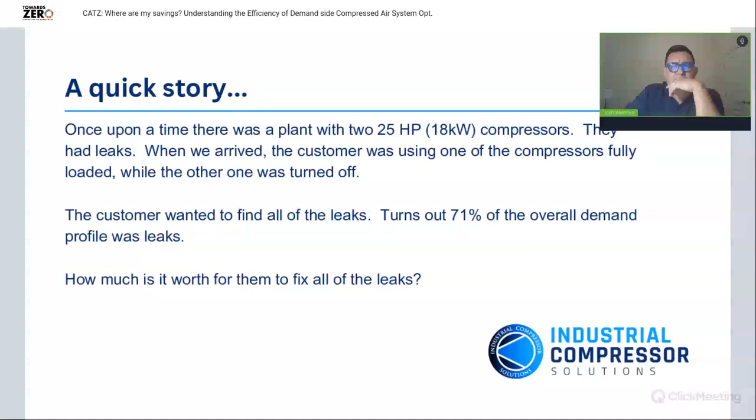Again, my name is Josh. I've been in the compressed air industry for about 25 years. Most of my career has been in the demand side of the system. I am a general contractor and a mechanical contractor. So yeah, I spend most of my time on the demand side and doing demand side auditing and optimization.

Very proud to be a member of Compressed Air Towards Zero. I am part of CAGI in rotary positive standards as well as system assessment. I represent the United States and ANSI for safety in compressed air. I am a member of the AICD as well as the Palmetto chapter of the Project Management Institute.

So again, where are my savings? First things first, we kind of need to talk about and make sure that we're all on the same page as to what savings are and/or means.

At the risk of proving to all of you that I am not an accountant and will never be an accountant, when we talk about savings in a facility, we talk about a couple different terms that get thrown around.

The first thing I'd like to point out is the difference between cost savings and cost avoidance. If we have an electric bill that we are currently paying and want to reduce that, that is an example of reducing existing cost and cost savings. Whereas cost avoidance is an effort that we do to prevent having to pay something.

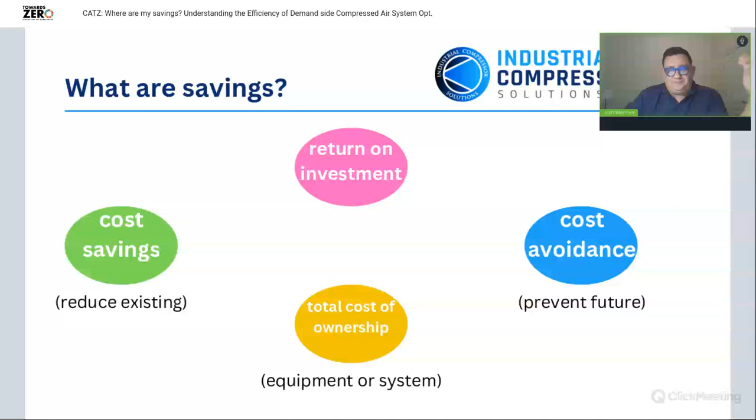Now, when it comes to total cost of ownership, that includes everything from start to finish that we have to pay for a piece of equipment or for a system. If we make improvements or change our operating mentality without spending, then we can affect the total cost of ownership through cost savings and cost avoidance.

But if we have an expense related to that, now we might hear a term like return on investment, where we're trying to evaluate how long it'll be before that savings is realized.

So my contention and what I want to talk about to you guys today is that this is not exactly right.

In my experience, there is an efficiency to our optimization methods. And if we are going to present to the customer some method of optimization, it's in our best interest as well as the customer's best interest to evaluate the efficiency and expectations of what that optimization is going to bring, and how long it's going to last.

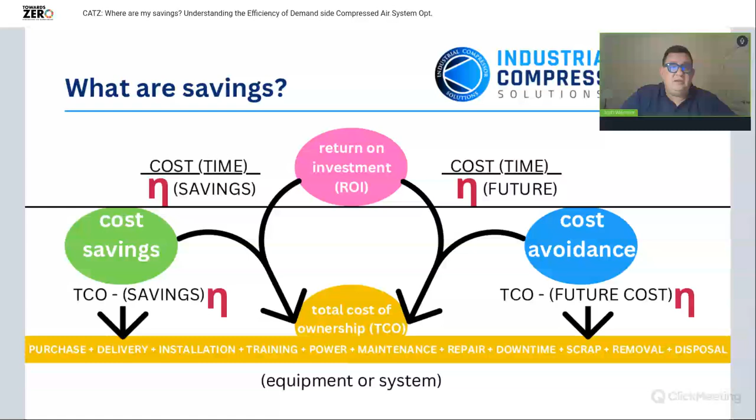So here's my super slide for the day. This is a very, very basic illustration of the fact that the compressed air system cost goes up over time.

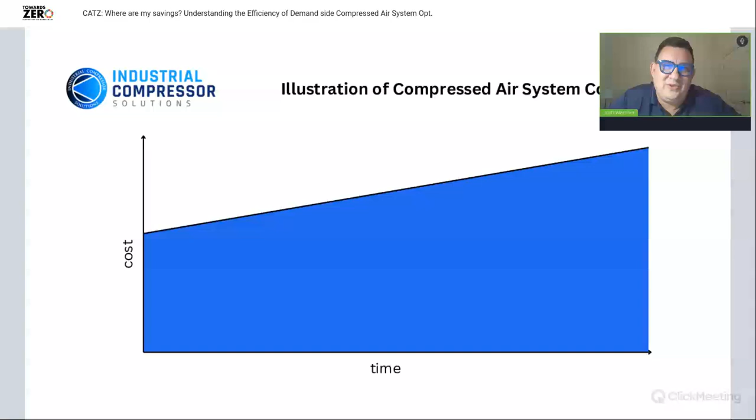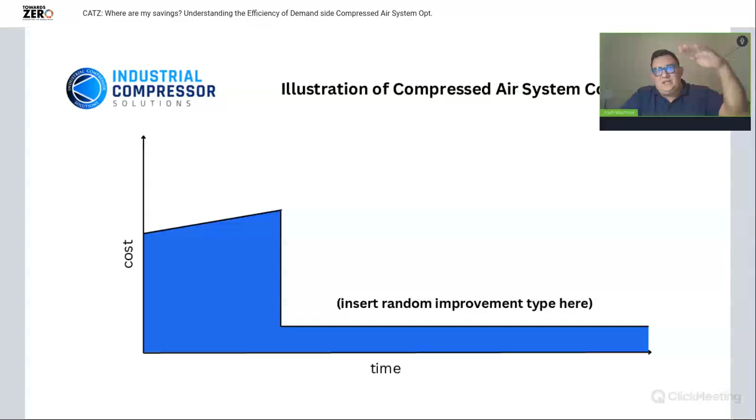If we perform an optimization, we are attempting to reduce that cost. But I'm going to show you today that there's inefficiencies in our optimization. Not only am I going to show you that there are inefficiencies, but I'm also going to talk about the fact that our optimization decays. So what ends up happening is, even though we made an improvement or optimization, we sometimes are not able to maintain the system at that optimized position.

So that efficiency, that optimization decays back to the original line. This is very similar to holding a balloon underwater. A lot of times we look at the people on the supply side of the system, and they're selling these really beautiful, high speed, super efficient air compressors, and every one is more beautiful than the one before it. Whereas on the demand side of the system, a lot of times it's like we're telling our customer that their baby's ugly. When we talk about demand side optimizations, we are forcing that system to a place that it does not naturally want to be. So I do try to use that analogy of demand side optimization being very much like holding a balloon underwater. It doesn't always take a whole lot to get that balloon underwater, but it does require that we consistently hold it there, and we force it to stay there.

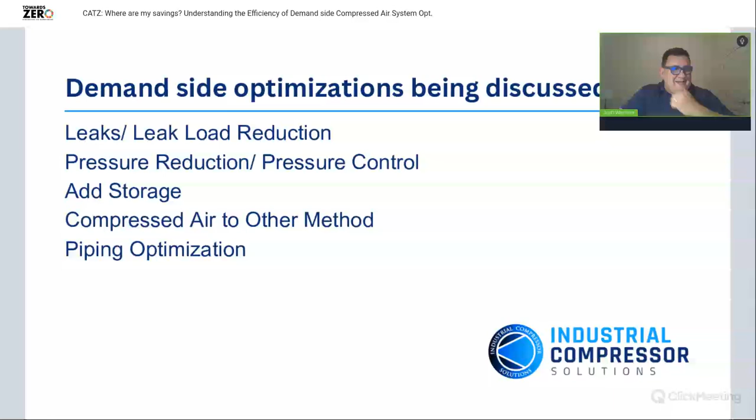So first, leaks and leak load reduction. Thanks, Daniel.

So when we talk about leak load and leak reduction, I first want to put up the control comparison between power and flow.

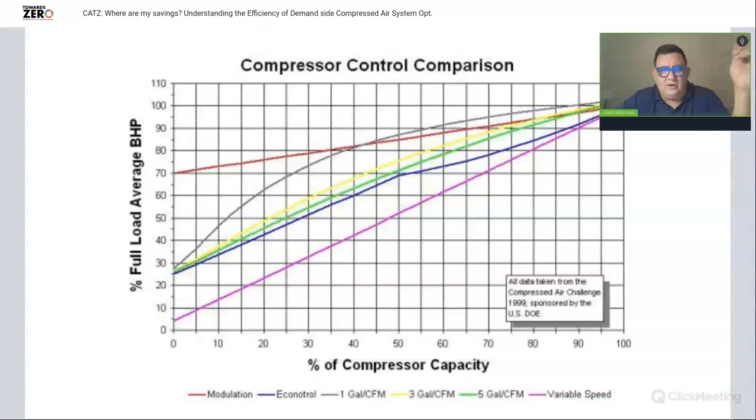In the story we talked about in the beginning, the customer had two 18 kilowatt compressors running in cascading control with local controls. Both compressors are oil-flooded rotary screw, and they loaded and unloaded, with the load set points offset from each other so that if the demand profile exceeded what one compressor could do, pressure would drop to the point that the second compressor would load and continue running without operator action.

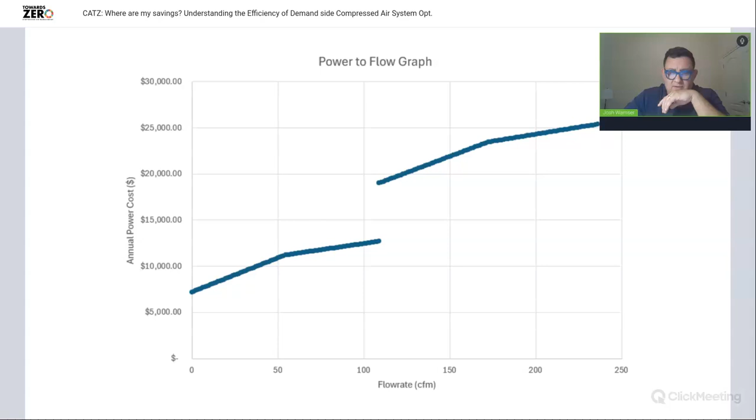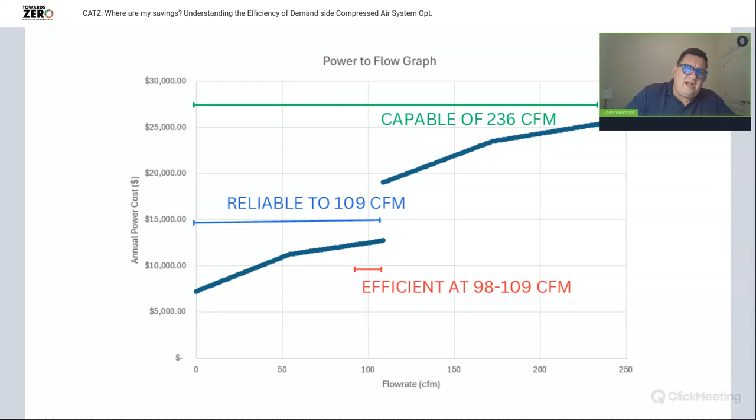So in this case, and I apologize for not changing these to worldly units, 236 divided by 35.315 equals, so that was right by 6.7 cubes overall, and around 3 cubes reliable without having the second compressor come on. But efficient operation was really in the top 10% of that compressor.

Now, when we got there, we noticed that the second compressor was turned off just temporarily, and the first compressor was running right at the top of its band. The interesting thing is it was running so much at the top of its band that the compressor stayed fully loaded, but system pressure was moving up and down while running at full load. We'll talk about that later, but this is another example of, instead of varying flow to maintain a constant pressure, we were varying pressure at a constant supplied flow.

As we said, the leak load was 65% of the overall demand profile, and that was right at 2 cubes.

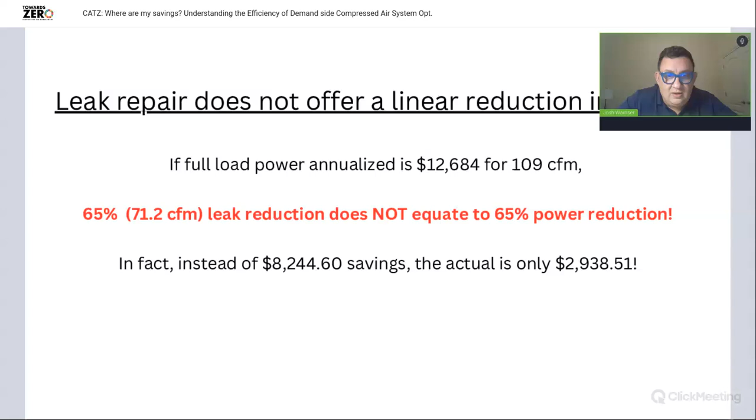But if full power annualized, which it was, $12,684 US, 65% leak reduction does not equate to 65% power reduction. In fact, of the savings the customer thought they were going to get, they weren't going to see $8,244 a year in savings. They were only going to see $2,900, based on the fact that we don't go proportionally down to zero. We didn't have linear efficiency across that demand profile.

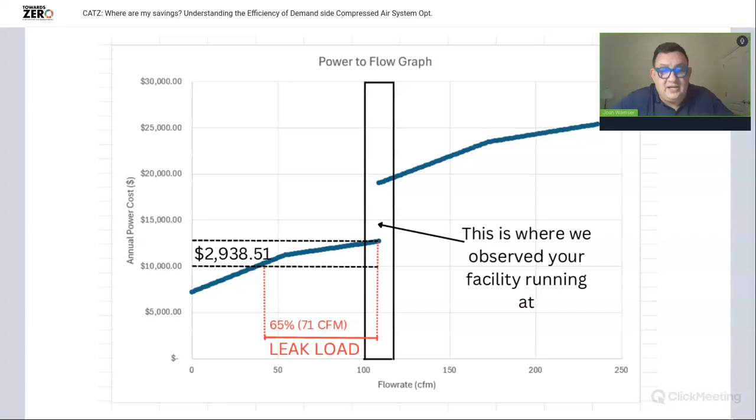So we have to follow the curve of the compressor. And what we end up seeing is our change in power cost is only $2,900. Now, if we had promised the customer $9,000 or $8,500, we would have been setting up that customer for failure. But I've got to ask you, is even that $2,900 real?

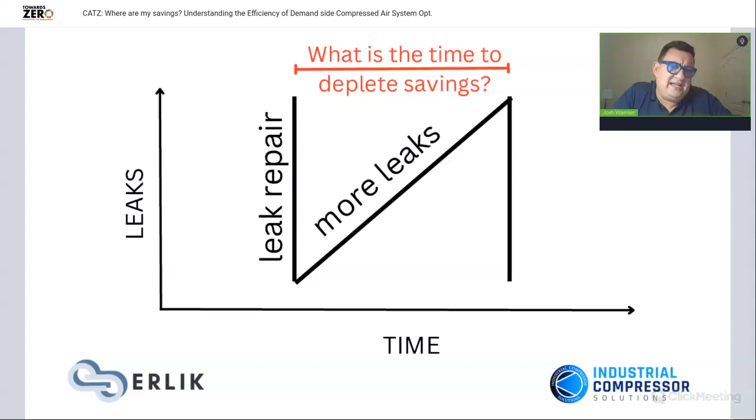We have to take into account the decay of the savings. I'm not saying that if you have a leak in a fitting and fix it, that leak will necessarily start again. But what I'm hoping you'll consider is that the leak load is itself a number. It changes by pressure fed to the leaks, and the leaks get worse over time. So even when we make a repair, at the same time more leaks are happening. We can bring down our leak load, but it will slowly come back up, and then we'll have to commit to another action. But the amount of time it takes to deplete that savings is important for calculating how much the customer would actually save.

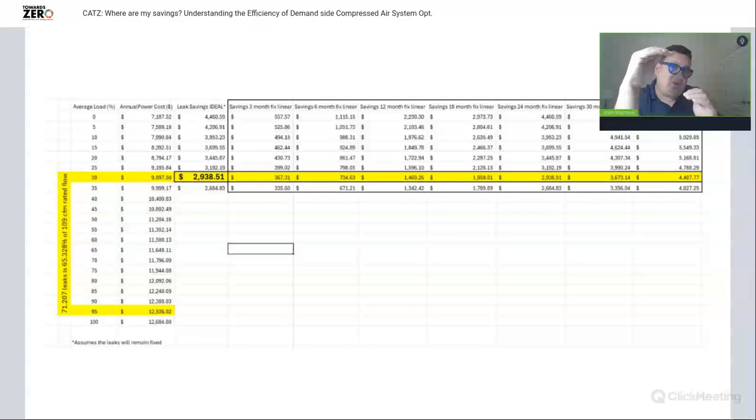So if $2,900 is my expected savings per year based on being able to reduce 100% of that leak load, those leaks would have to either stay completely gone - the leak load would have to stay zero for 12 months to get that $2,900 - or in a linear form, it would have to return back to its original position in 2 years. After 2 years, you would have had the savings promised, the annual savings promised based on linear decay.

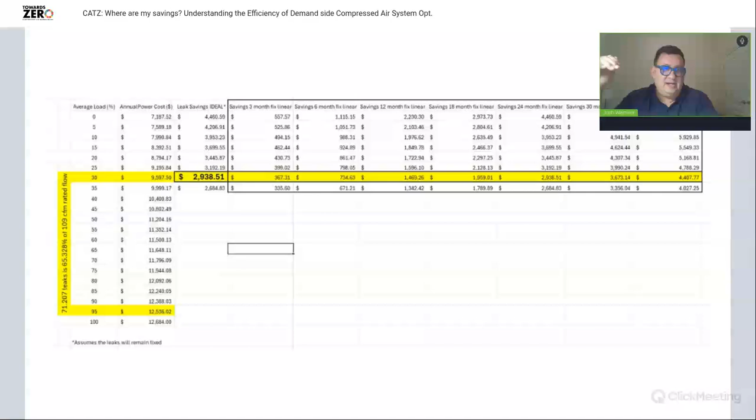But how about that second compressor? In a position where you have two compressors, load unload, oil flooded rotary screw, at that 3 cube point, or almost exactly 3 cubes, you can be in a position where compressor one is running fully loaded and the second compressor is off, or you could be at that same flow rate with compressor one running fully loaded and compressor two running unloaded.

The difference between those two positions is zero for flow, but in this case was $6,300 in power cost. Just by not allowing that compressor to run in an unloaded state, we have a cost avoidance of $6,300, as well as the fact that in a system with two compressors, the moment we're running that second compressor, our reliability position has changed. And the moment we're required to run that second compressor, we don't have a backup compressor. One compressor shuts down, hiccups, trips out, whatever, and now we can't maintain plant pressure and we're down.

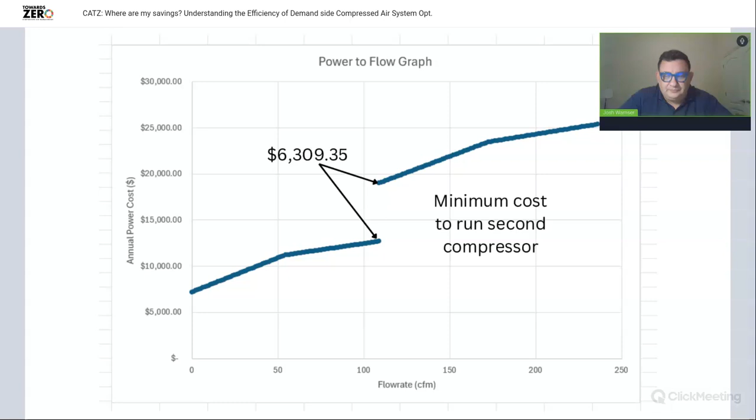So now we have a $2,900 savings, or some percentage of that we can try to get - a percentage we can fix and a percentage we can keep - as well as $6,300 in this position of not having to have the second compressor on.

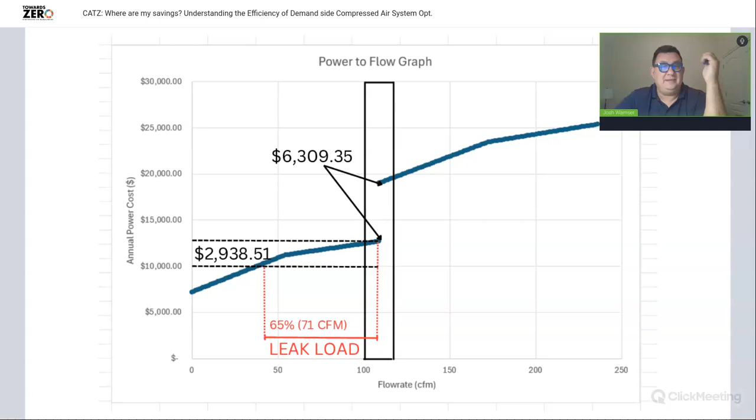Going back to the financial terms in the beginning, this is the difference between cost avoidance and cost savings. Now, both of these have efficiency attached to them.

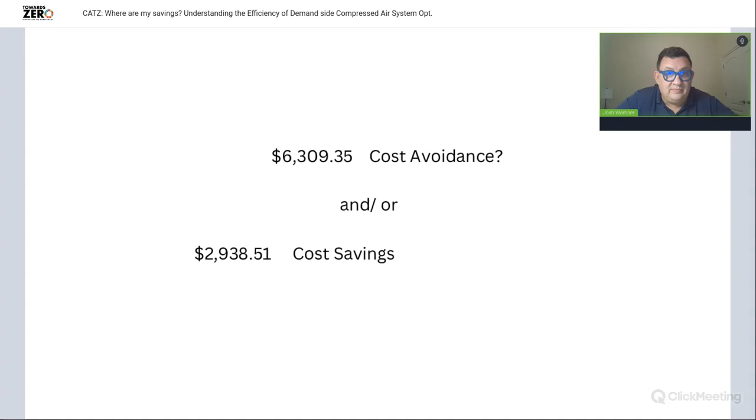So in this example, there are a couple different costs we have to look at with the customer. I think one of the critical points is having the customer understand that we're not over promising anything. We want to be very realistic with the customer as far as what are they intending to save, what is the cost to do the leak study and the cost to make the repairs, what is the time to deplete the savings, and when are we going to trigger another leak study.

This conversation ended up being really positive with the customer because we found that preventing the second compressor from coming on is the most important thing. That was good enough to change the employee's mindset on fixing leaks in the facility, and they had their maintenance people charged with going through after hours and fixing leaks.

Now I make half of a little joke here. It's a little joke, but I also want to be careful that I'm not being disrespectful to people that sell air compressors for a living. When a customer says we don't have enough air...

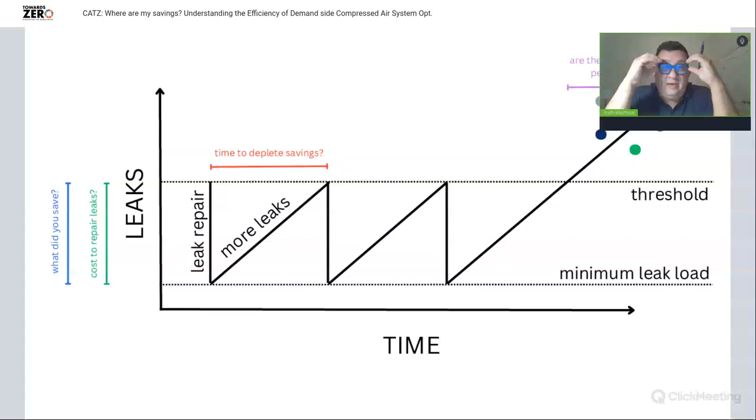it is natural for a compressor salesperson to evaluate how much air is being used and provide an air compressor to solve that need. They might not be trained in the demand side, and the customer might not even be wanting them to look at the demand side. In that scenario, the compressor salesperson is doing what they are paid to do by putting in, hopefully, the most efficient and most reliable offering possible to meet the customer's demand, instead of trying to optimize that demand before making a purchase.

This goes to what we're saying about when that demand profile increases. If we don't have a backup compressor and we don't have monitoring, automation, or controls, what ends up happening is this demand profile keeps increasing to the point where the supply cannot overcome the demand requirements. In that case, pressure starts dropping until something starts failing and we'll get a call. But by then, the plant's already down.

So my argument is use benchmarks and thresholds to say, let's keep the demand profile short of what is needed for the backup compressor to come on, and let's sound the alarm when we go into our backup compressor. Now, if we do that, my question and my challenge to you all is, how do we know how close we are to that threshold line?

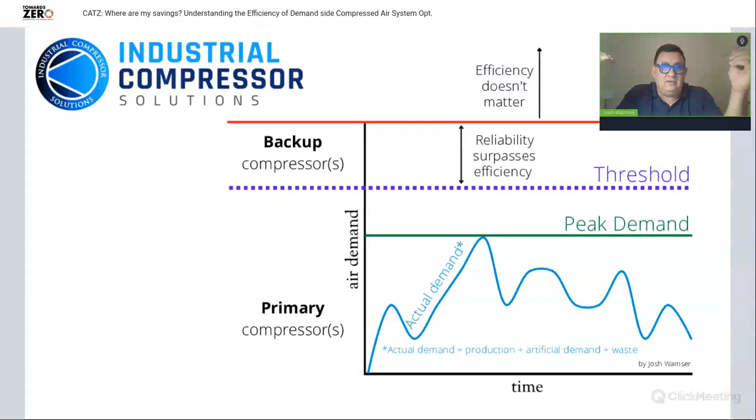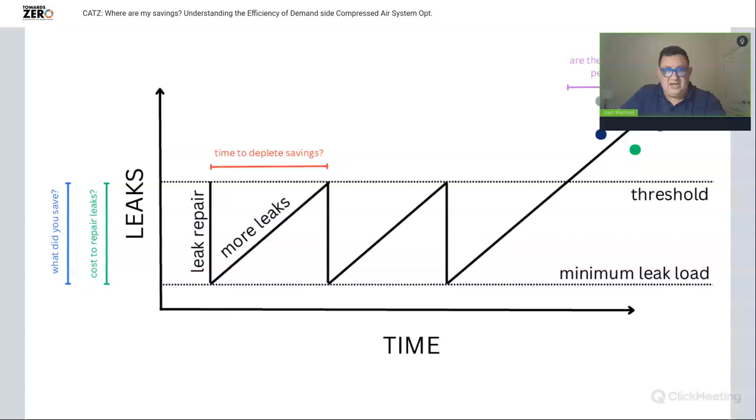If we know that in this case we have 3 cubes before the second compressor comes on, and if we're operating at 2.9 cubes 10 hours a day, then we are right there at the point where we are about to change our reliability position. In that case, we now have to answer with a rental compressor, with an additional compressor, or with demand side optimization to get us back to where we can operate properly.

As far as leak and leak load reduction goes, a common practice is assuming the reduction in flow is proportional to a reduction in power. That's just not correct, as the inefficiencies go, especially with the effect on pressure with unregulated processes.

If we have to shut down to repair leaks, there's a cost of having the line down or the process down that has to be accounted for against it—compressor room efficiency at the new demand profile, running leaks versus shutdown leaks, depending on where and when we measure the leaks.

If we look at a process and we supply air to that process, but the process is off or not in running condition, any leaks on the secondary side of the solenoid valves internal to the process are not being fed. So you lose the demand, but you also lose the waste. Depending on when and how you calculate your leak load, and how you're doing your leak studies, that's going to tell how much you're going to capture as well.

Now, if your leaks are on the downstream, secondary side of the solenoid valves, the cycle rate of that process equipment is also going to affect the savings back to power. So if that line is only open 30% of the time, we can't account for 100% of power savings, even on a perfectly matched efficiency from initial demand profile to new demand profile.

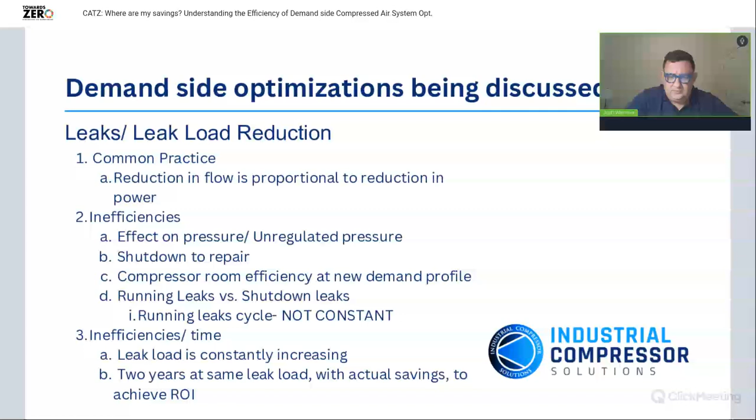Okay. All right, so pressure reduction and pressure control. Yeah, I thought I hit it again. Pause for effect.

So when we look at pressure reduction and pressure control, we end up taking into account the overall system. And I'm actually going to switch slides real quick, so I'm going to jump around. Pressure reduction is taken in four separate places. The first place that we control pressure is at the compressors. We can do this in local control, or we can do it with automation for the compressor station overall.

The second place that we can control pressure is on the plant level. That is going to the entirety of our facility. From there, we can also control pressure on the zone level. If we have critical processes or a process group, we can control pressure to that entire area or zone. And then the fourth is the individual processes. But when we talk about efficiencies and demand side optimization, having an understanding of the pressure mapping as well as the flow mapping is going to determine where, when, and how to do these things.

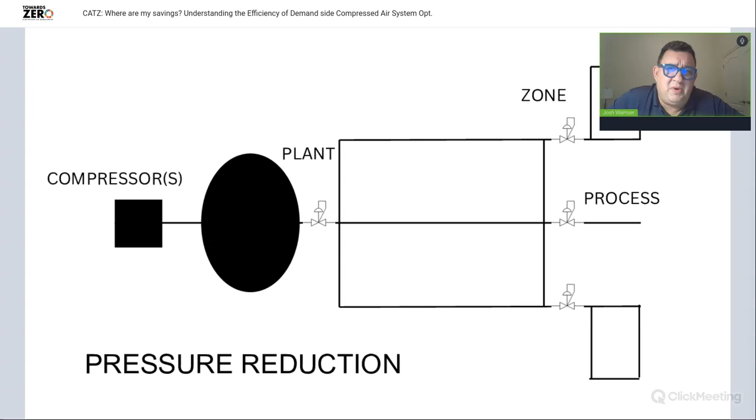Now there are benefits to controlling pressure in multiple different places. Sometimes there's benefits to just control it at the plant level. So for example, if we needed 6 bar pressure to every single process and process group, then we might want to control that at the plant level. Now what happens though is if the piping is undersized or marginally sized, we might choose to leave it at the higher pressure and regulate it down at the zone level or process level instead. We also have the backup aspects of sometimes we want to regulate pressure at the processes and then additionally somewhere else behind it. That might be a stepped approach, or it might be even.

Remembering as well that there's other pitfalls to pressure control. If the pressure control device is not properly sized to the process flow requirement, then it'll either hunt or droop. So for example, if you have a flow controller and it is rated for call it 100 cube, you're going to be at about 30 to 40% of that. It's going to be too small for it to be able to control that pressure, and you will see that the secondary pressure will start going up and down. It'll hunt, because the control method is just too large to be able to handle the constant pressure control. If we exceed that 100 cubes, then we end up seeing droop. It just can't maintain the pressure as well.

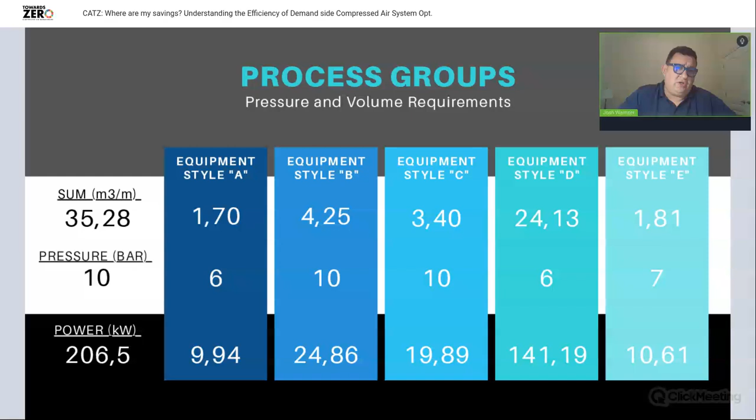So when we did our process mapping, our pressure and flow mapping, we were able to gain a little bit of a picture of what the demand profile was, and we decided that pressure control was one of the key things that we needed. In the beginning, we had 10 bar on 2 of the processes, 7 bar on a third process, and then the last 2 were stated as also being at 6 bar.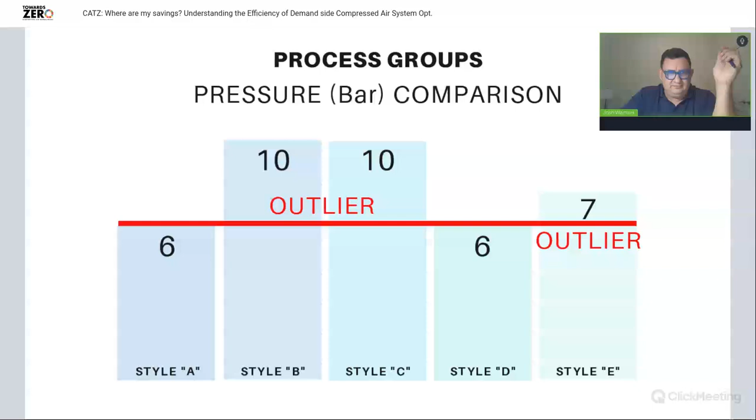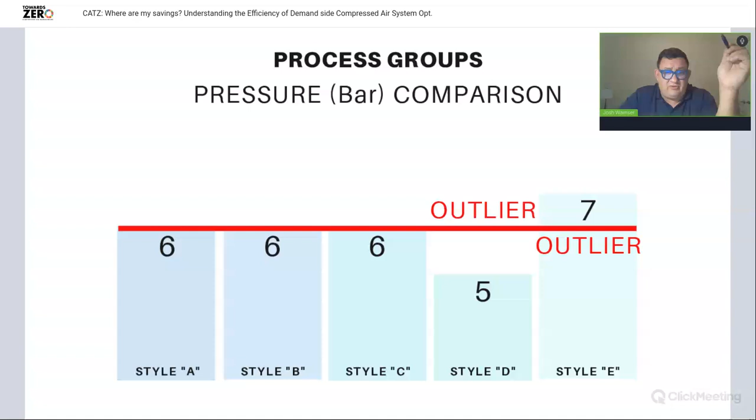But we found that those were not actually correct. And when we talked to the customer, we put in some pressure control devices and got the pressure down on 2 of those different styles. What ended up happening is that the customer went from spending $192,000 a year in power to $55,000 a year.

When we talk about inefficiencies, though, in reducing pressure, we have a scenario here that we found a couple weeks ago where repeatedly we are having situations where the demand profile was changing, but the power from the compressor room was not changing with it. In this case, between position 1 and 2, there's almost exactly 360 cubes of difference in the demand profile with only 3 kilowatts of change at the compressor room.

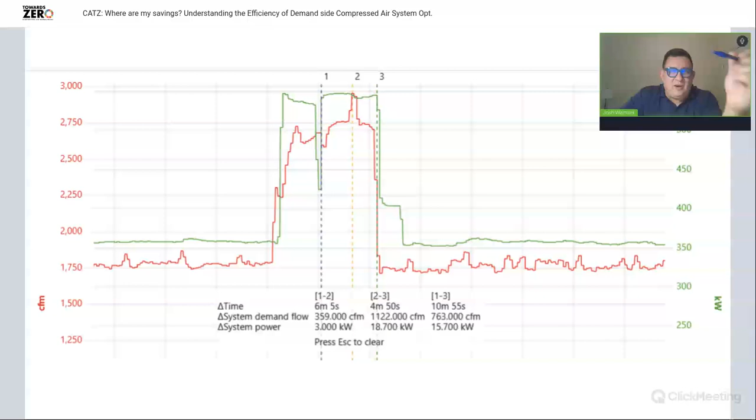Now, if you consider that for a second, if we reduce the demand profile by 360 cubes and don't save any power whatsoever, there's a little bit of liability to all of us, right? So again, we want to be careful with our pressure mapping and our flow mapping to get a true understanding of what's going to happen and where.

I would like to point out back to this slide that if we have good pressure control at all 4 places, but we lose it at any one of them, then we immediately change the nature of the entire system.

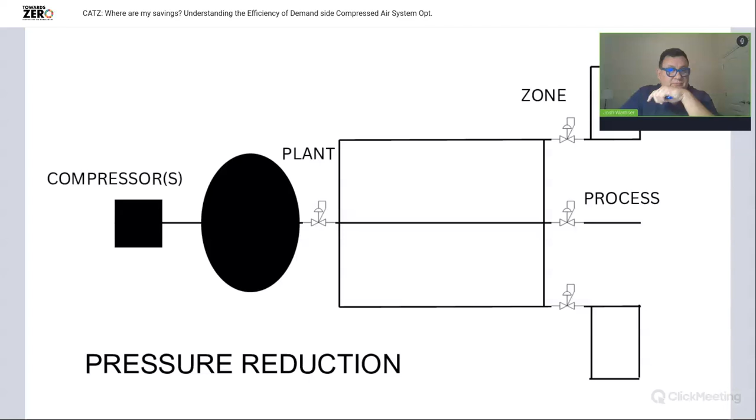In this system right here, as well as the system we were talking about with the 3 cube operation, when that second compressor was off, we found that the first compressor was running fully loaded and the pressure was changing while the load was constant. And the system moves back and forth. Both of those two systems actually were having similar attributes.

When operating properly, when the demand profile is less than the supply capability of the compressor station, then load changes on the compressors to maintain a constant pressure or constant pressure band. But once the demand profile exceeds the supply capabilities, the first thing that happens is storage is reduced in any receivers that you have. Once that is depleted and pressure is constant across the line, if the demand profile is still higher than what the supply can provide, then pressure is changing while the supply side is constant and fully loaded.

Now, in the first case, supply efficiency is highly dependent on part load efficiency, and reliability position varies depending on what equipment you have in the space and the relationship between the supply and that overall equipment. In the other case, where the demand side is higher than the supply capabilities, now as the demand increases, pressure drops with all compressors fully loaded.

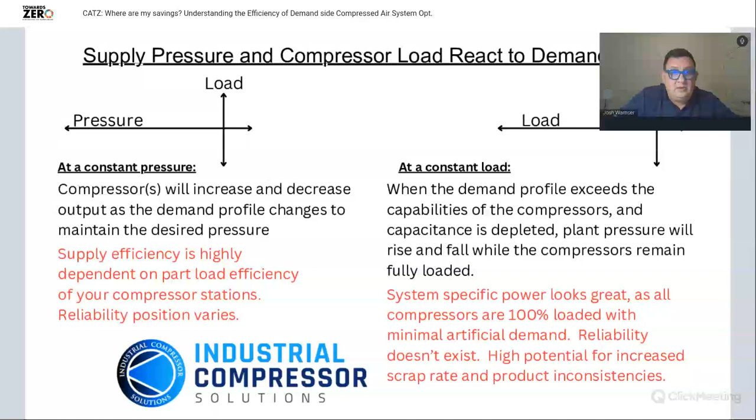So when it comes to pressure reduction and pressure control, common practice is automation, reducing pressure drop, installing pressure control devices. We talk about inefficiencies, compressor room inefficiency at the new demand profile, reducing storage for intermittent demand, and off-shift demand reductions or requirements might further put that compressor room out of spec. Inefficiencies are a function of time, whether these pressure reductions are turned off, whether pressure is turned up.

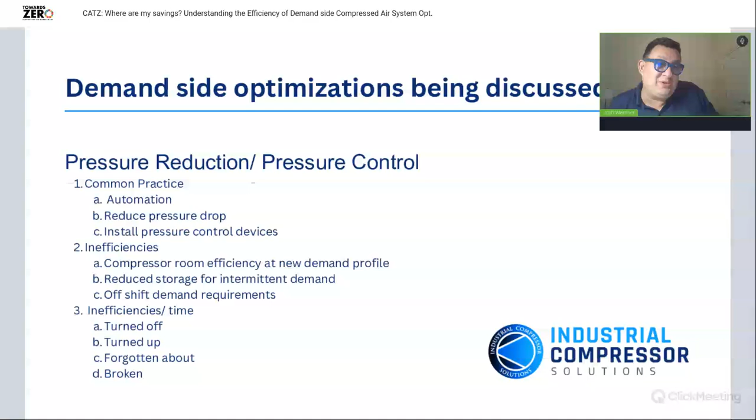Or whether they made changes to the valve lineup for maintenance or repair, but then didn't return it back to the position it was supposed to be in. And or if you have pressure devices that are broken.

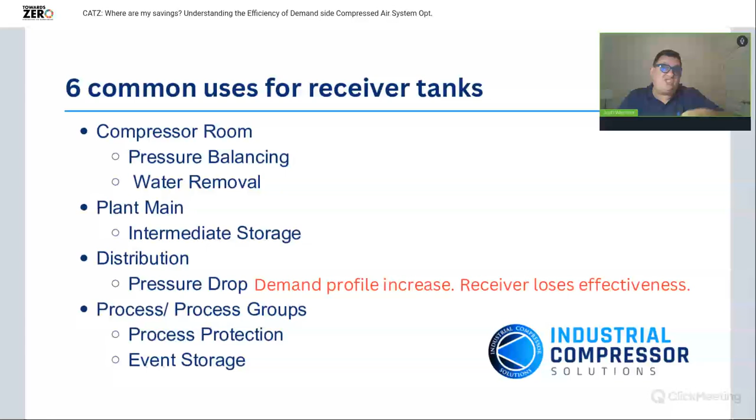Distribution: if the demand profile increases, the receiver will lose effectiveness, especially depending on how tight you size that receiver for the pressure drop that you saw when it first started happening. But changes to that demand profile are going to change the effectiveness of that receiver tank.

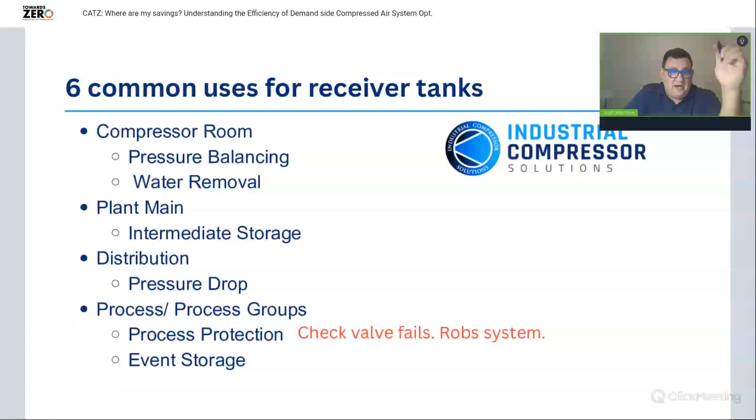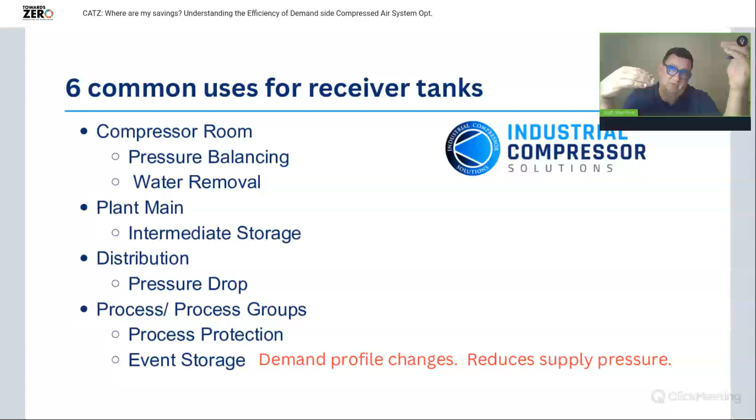On the process protection, if the check valve fails, it'll just rob the system - it'll rob the storage completely. And then on the event storage, if the demand profile changes and the supply pressure to that receiver tank is reduced, then the differential pressure across that receiver is also reduced, and thereby the usable storage is reduced.

So we talk about adding storage, installing a tank, check valve, pressure control. But on the inefficiencies, if there's a constant demand, the receiver tank's not going to do anything. The wrong size and or pressure feed line can create issues, especially when you're using it for intermittent demand, where you evacuate the contents of that tank. But if you're not metering the air back into the tank, you can cause the same problems you were trying to avoid. Changes in cycle and or broken components can affect storage capabilities very, very quickly.

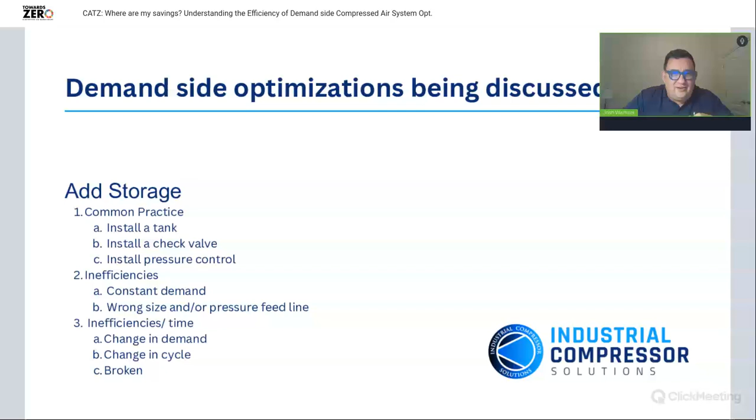I met a gentleman earlier this year named John Bilski, and he's a wizard when it comes to drain traps and such in a compressed air system. It makes me giggle sometimes, because how many times have we seen where one bad drain trap or one clogged Y strainer allows a receiver tank to fill up with water, and you are sitting there staring at this huge receiver tank, but when you're watching how the system operates, there's no receiver, right? So another thing to be aware of.

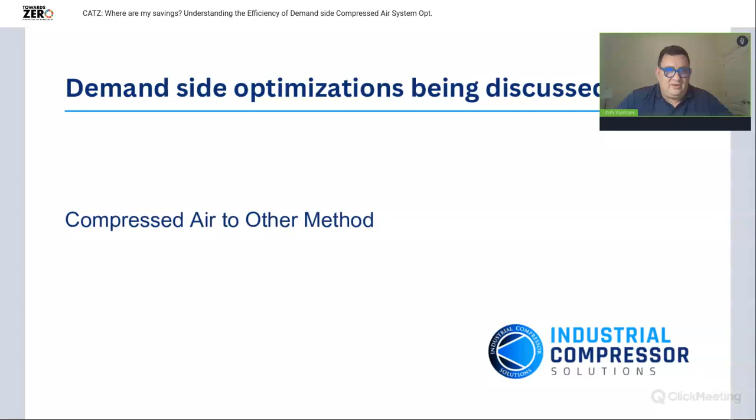I got to be careful - compressed air to other method. When we remove compressed air processes from the system, and isolate piping and processes that are non-critical or not needed at the time, we have to go back to the inefficiencies of the compressor room, or the minimum operating capabilities of the compressor room. I was recently at a facility using 990 kilowatts of compressor, or what they have on the system. They have three 335 kilowatt compressors, so that's 1,005 kilowatts, right?

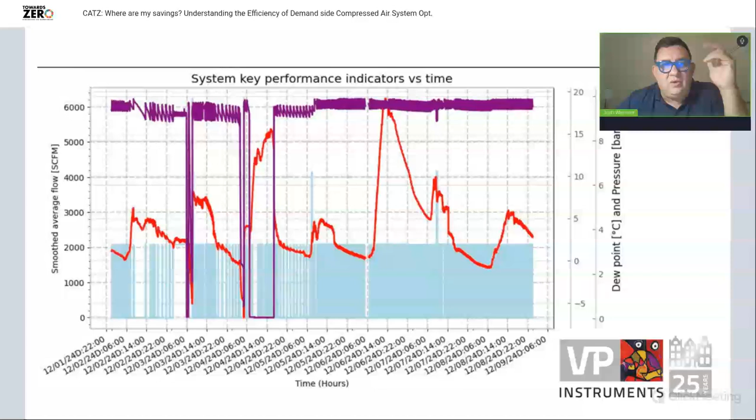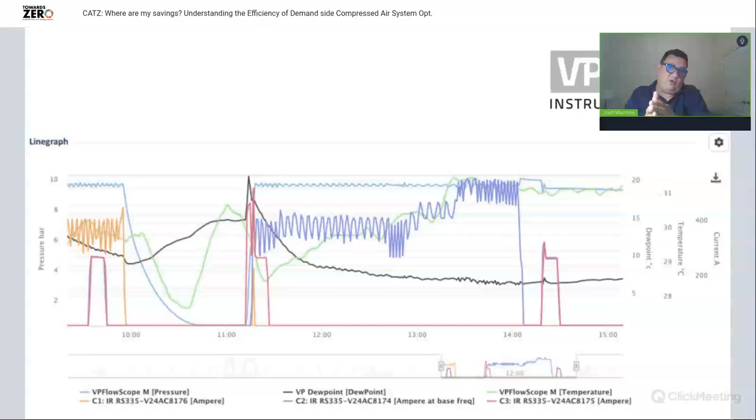This is a little bit of an extreme example, but what is the effect? What is the effect of the optimization? What is the efficiency of the optimization, the decay of the optimization? What are the things that are not positive? What are you going to have to overcome under the new operating conditions? There's no magic solutions - we say this a lot, but there are just no magic solutions. We are going to have a set of challenges that we're going to have to account for no matter what.

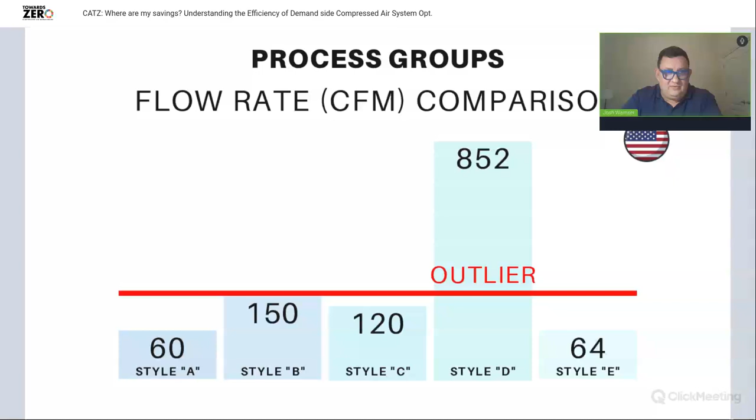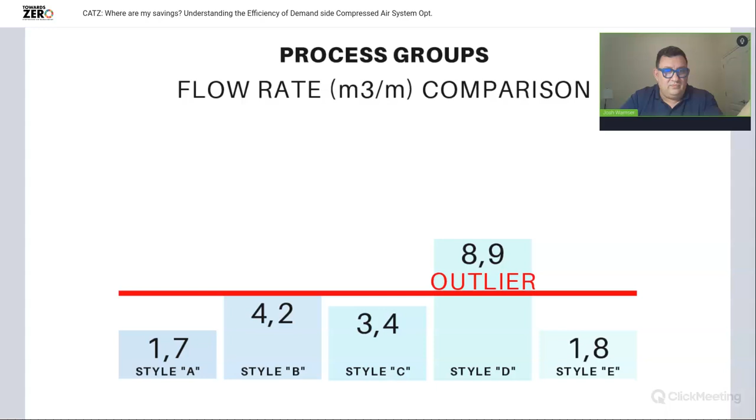In 2 minutes, I'm going to wrap up by hook or by crook. So piping optimization, along the same lines - that same plant I showed you earlier had 5 different styles of drops. The flow rate comparisons were made, and we figured out that the cycles were not the same. So we're able to store air for intermittent demands, as well as turn off air and cycle things differently. That also contributed to getting that system operating at a lot less cost.

Now, sadly, it's important to say that the customer did turn off this system. Not only did they turn it off, but instead of running 4 compressors like they were before they called us, they bought 2 more. So now the customer's running 6 compressors. They decided against holding that balloon underwater. They decided against maintaining that level of optimization. They'd rather pay for additional equipment and just take compressed air off their plate. That was the effect of a change of leadership, and it just threw us out of the way.

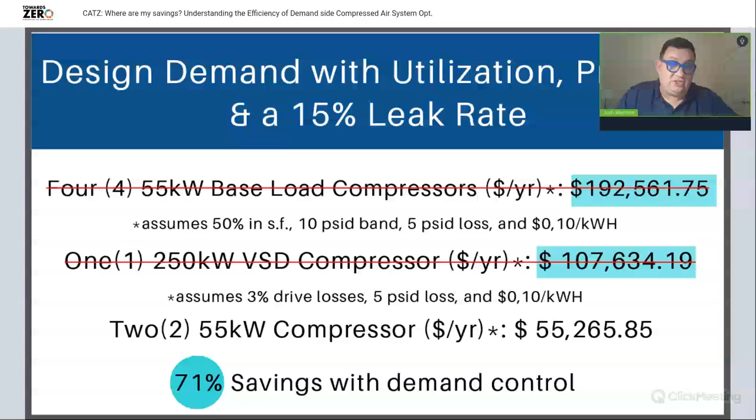So - running additional pipe, installing big pipe, inefficiencies in the compressor room at the new demand profile, old piping and leaks, higher pressure versus unregulated processes, unaccounted for costs. The decay is going to be changes to the demand profile, loss of pressure control, and change in personnel.

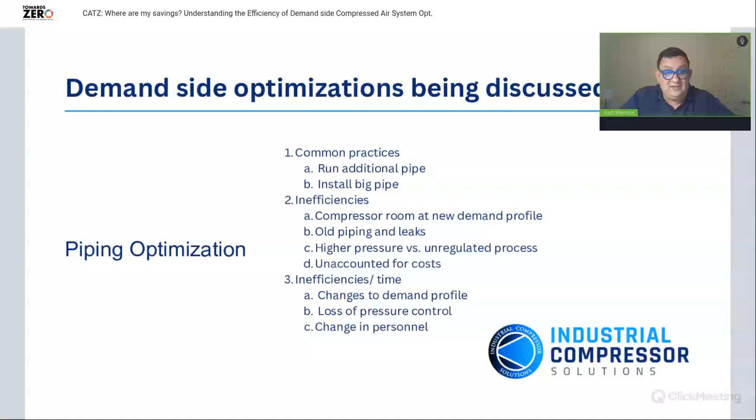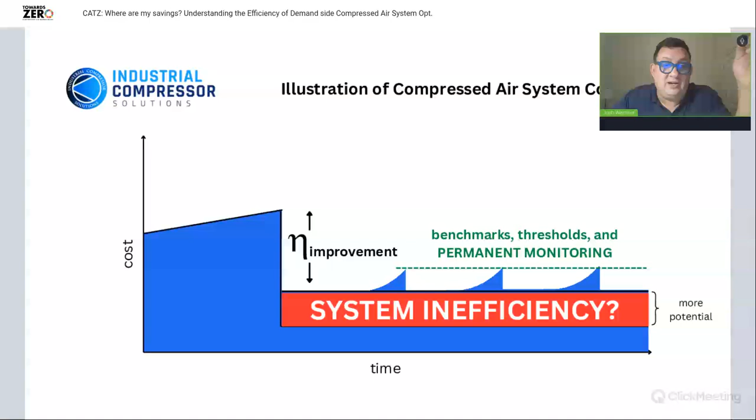So again, there is an efficiency to what we optimize, and there is also a decay associated with it. We need to be on purpose when we figure out how we are going to maintain the optimization that we're trying to provide for our customers. There are plenty of reasons why the savings aren't what we thought they were. There are plenty of reasons that the gain is not maintained.

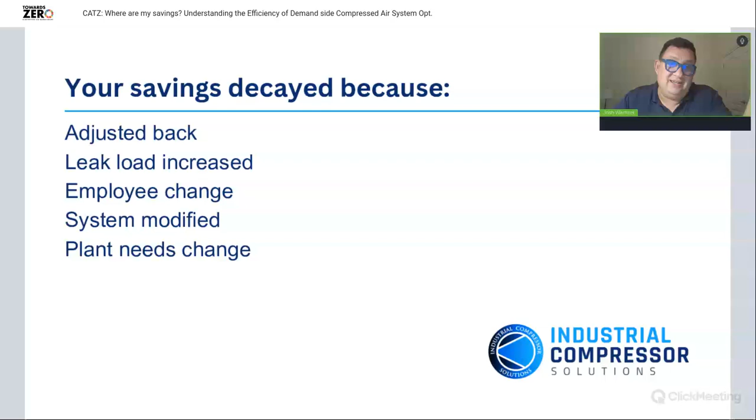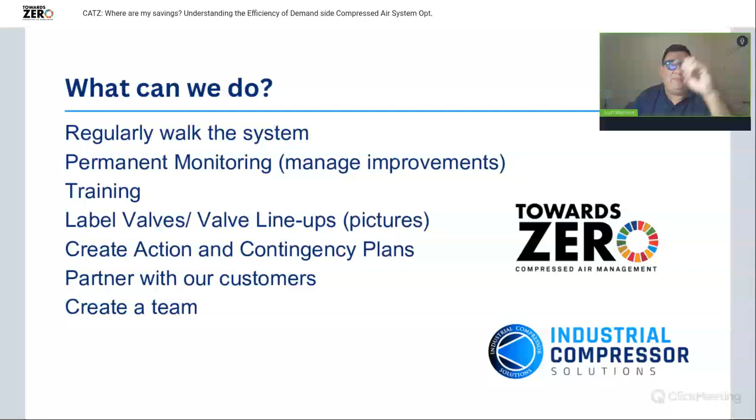We can regularly walk the system. We can permanently monitor the system and be noticed to change. We can do training. We can label valves and valve lineups, including pictures, create action and contingency plans, partner with our customers, and have a team approach to managing the compressed air system and optimizations. Strongly suggest not over-promising, and there is just no magic solution.

Now, Mr. Wojciech, I don't know how to do questions on this, but are there any questions? So far, we don't see the questions. In the meantime, perhaps it will come.

I have to admit to say that it's not that easy. The leaks are not that easy. So if you do not perform the holistic approach, you may think that you're solving problems, but you are not solving those in real life. So if any questions would appear, our director behind will display it. Okay, there is a question. Kasia will show it to us. Okay, here you are, Josh.

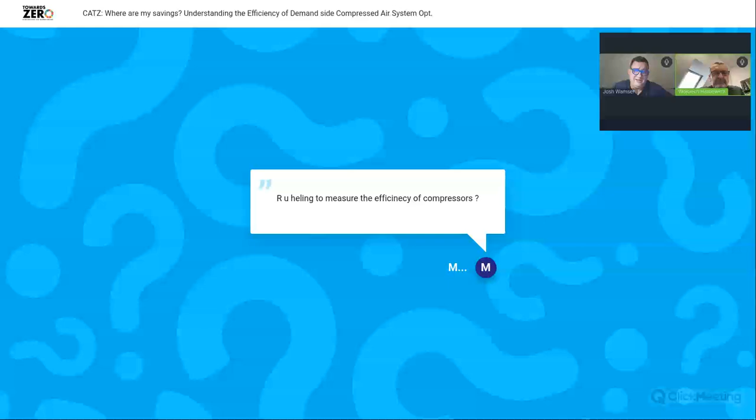I'm so sorry, I don't understand one of the words. Are you helling? I don't know the word helling, H-E-L-I-N-G. All right, Melanath, would you please clarify what you mean by helling, H-E-L-I-N-G?

All right, we have to wait.

It's helping to measure the efficiency of compressors. Probably that's the question. Helping. Measuring the efficiency of compressors is critical to me. Thank you so much for your clarification. Measuring the efficiency of the compressors is really important to me.

One of the things I like to do, I left it out of this because it's more on the supply side, is I like to measure flow at a couple different places in the system and then revert that back to the power. So I'm measuring specific power at multiple places in the same system and doing comparative analyses of that specific power. So the efficiencies of the compressor, sure, but by looking at the variations through the system, it reverts back and shows us changes in efficiency in the dryers and filters, but it also can show changes in the effectiveness of usable storage and what you're delivering to the facility. So yes, I do measure the efficiency of compressors on a permanent basis, and I hope that answers your question, sir, or Malna.

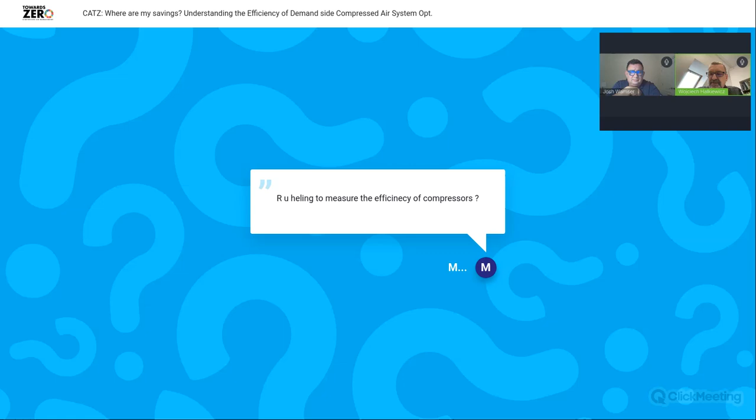All right. So on the demand side of the system, if you are using flow and pressure in one direction, it does depend on the overall mapping of the system. So we could take pressure as a function of where it is supplied to the distribution network. So if we said, hey, it's 7.0 bar at the point that the compressed air enters the distribution network, then we can look at pressure drops throughout that system and see how they vary to each other. So if the system is being supplied by the compressor room, then you shouldn't see an increase in flow on one process being robbed by the other processes. Instead, it's being managed from the compressor station. But by looking at flow and pressure and mapping that in your facility, that is how it's done. But it is done with flow meters and pressure transducers. I know there's some people that do it with velocity meters, but I have not personally done it that way. So while I mention it, I'm not the guy to talk about that.

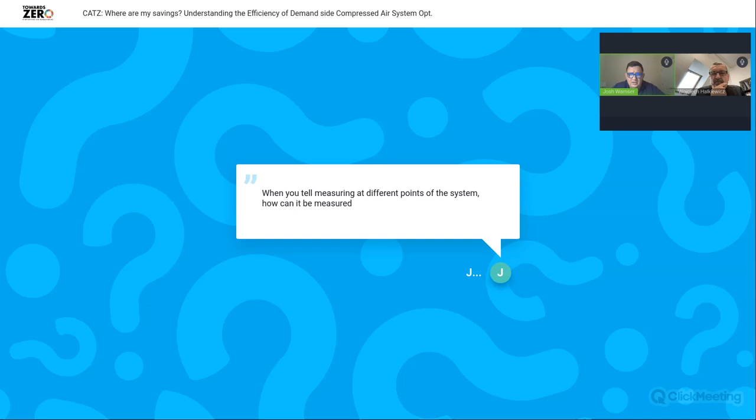Well, in that case, it makes sense to have two separate pressure controls, right? And then the secondary question is, what happens if that one pressure control device at the individual zone failed? If it's set at 2.3 bar and that one pressure device changes, we just went from operating at 40 kilowatt to 90 kilowatt, depending on the pressure in the rest of the system. So we had a high risk. Now, we don't want to oversize our pressure control devices, but we don't want to have a lot of loss in them either. So there's an argument of, do you have a secondary pressure control at the zone level, or do you put that at the process level and back it up that way?

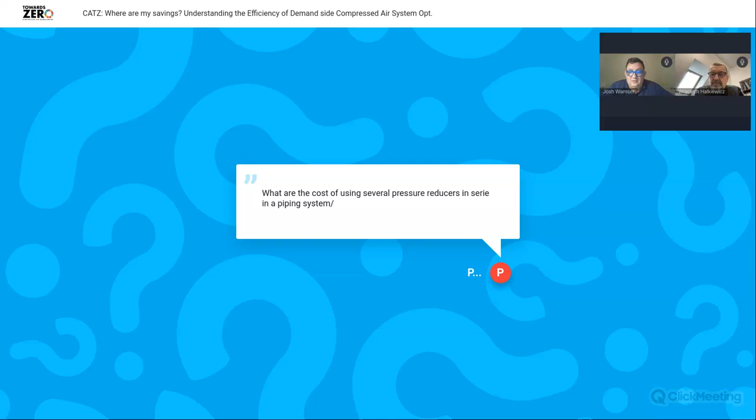Okay, we have another question. Okay, here we have it. Oh, even more. Okay. Oh God, this is a great question. All right, so man, these are awesome. Man, for 6 o'clock in the morning, I'm halfway motivated. I might have to go run.

Pneumatic components are designed to run at a pressure, but a lot of times that is a max pressure, not the minimum pressure they need. I can't tell you how many times I've seen a system designed for 6 bar or 6.2 bar, and then found that there's 4 meters of 4 millimeter tubing and a 1 bar cylinder at the end of the line.

When we talk about the potential to make savings and optimizations on the demand side, I would almost argue that if we don't go into the processes, the majority of the savings is going to be in optimization of the supply side in the compressor stations. But if we're willing to go past the regulators and into the processes, and work with the machine builders and process guys to optimize the processes and process pressure, the majority of the savings become on the demand side.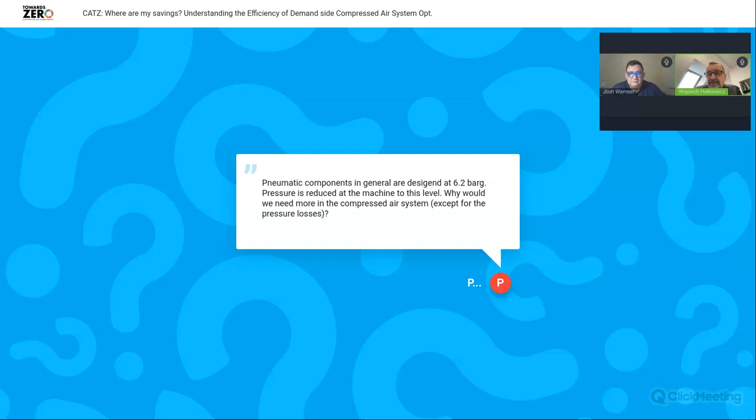So, okay, we have one more question. Okay.

Yes, there's definitely benchmarking that's different per application, and there's also different strategies for doing it. Sometimes we take a known acceptable pressure and then a questionable pressure. So if we're running at 7 bar, but we all agree we can run less than 6 bar, then relatively fast, maybe even over a couple of weeks, we can take the pressure down to 6 bar. But once we start approaching 6 bar, we're no longer all in agreement on how to reduce it further and what the effects are.

So really, once we get past the known acceptable pressure, once we start approaching that, we really have to be careful. We have to be incremental, and we have to stop and check every single adjustment that we make. We have to circle back around and see what is being affected by it.

We also have a threshold to optimization for increase of risk and perceived increase in risk. If we're causing so much anxiety to the plant operators and plant management, they're going to say, nope, just buy 2 more compressors. I'm already getting screamed at for an hour before I come to work, and 3 hours after I get home, I'm not doing it at work.

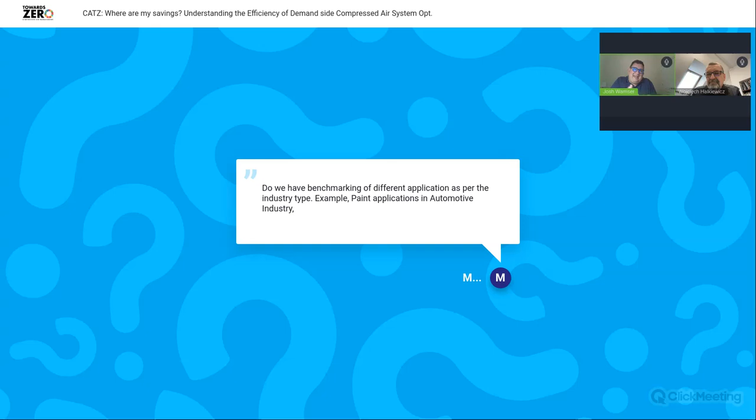So yes, to answer the question, there are different benchmarks and maybe ideas of where you can be based on different types of applications, but you're still really going to need the buy-in from the customer and do it at their threshold for change, and threshold for optimization.

All right. Next one. Great. Oh my God, these questions are awesome.

Is electric better than pneumatic? It's a different set of challenges. I've seen scenarios where they try to use electric. I've got an at-home example. Even though I love compressed air more than anything, I also love Milwaukee tools, and I bought a battery operated nail gun. I was very motivated because I have a 6 meter by 9 meter deck that my wife asked me to put a new top on this summer. So I did. What I found out though is I can't have my cute little carousel battery pack sitting out in the sun, because when I switched to electric, all the batteries were dead in about 4 seconds, and I ended up having to go get the air compressor and run the hose out and get the pneumatic gun. It's not as cut and dry as just asking, do you have power out somewhere?

I can answer that same question in regards to drain traps. Sometimes I like to have a powered drain trap, with a dry contact to know when it's failing. But if there's no power out there, what is the cost to run power out there? Is it a safe environment? There are environments where compressed air is the best way to go, and there are also issues where electric is a lot more efficient.